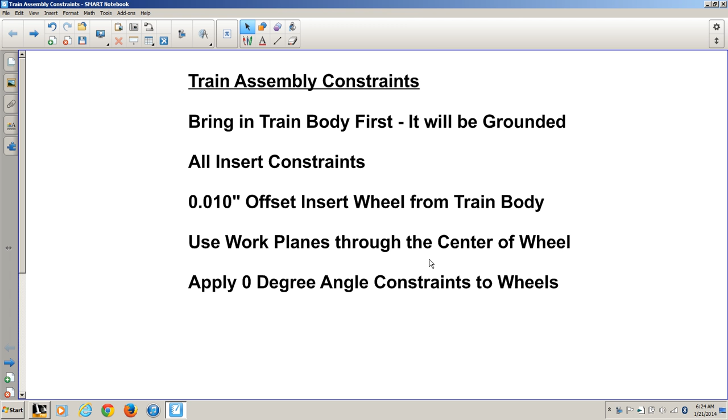Okay, we have the train mostly assembled. What we want to do now, we want to get the wheels all tied together using angle constraints. You'll also notice I just saved this as train. And again, if we look at this from the top, we've got a nice little bit of clearance between the wheel and the train body, so the train will be able to roll.

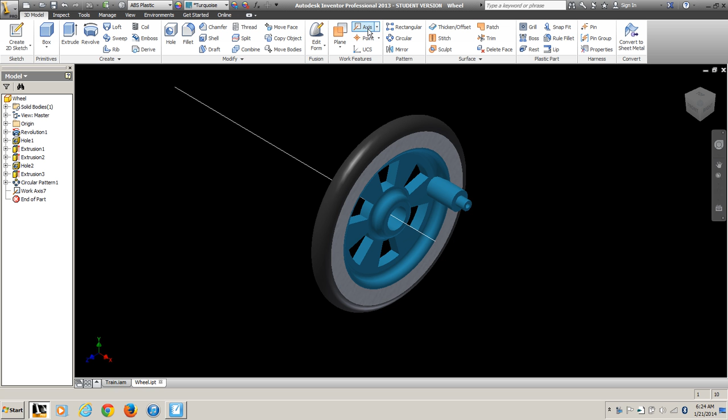To do the angle constraints, you're going to open up the wheel, and then we want to use work axes to create a work plane. So I'm going to point at the axle hole, and then I'm going to get the work axis tool again, and I'm going to point at the hole in the link peg extrusion there, and then 2 lines forms a plane. So now if I select those 2 work axes, that turns the work plane on.

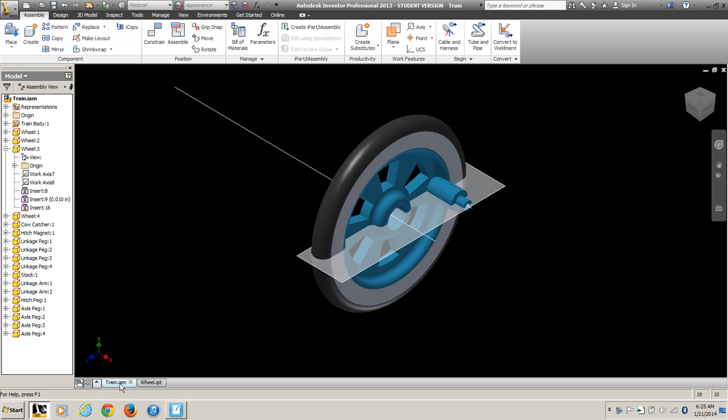You want to do that in the wheel file itself, not in the assembly file, because then that work plane will be turned on for all 4 wheels in the train assembly file. Okay, so now select angle constraint, and now we just want to tie those 2 wheels together.

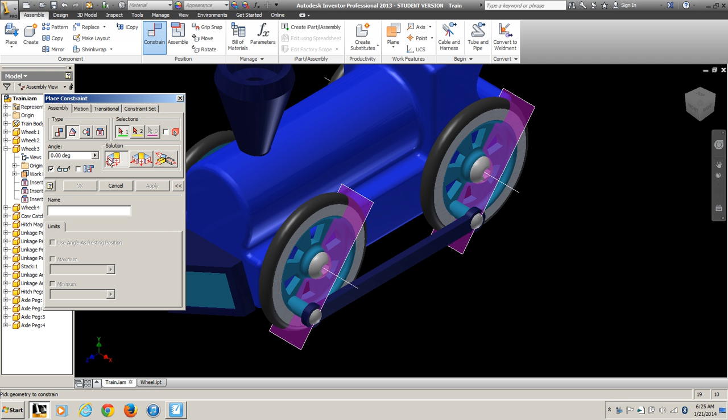When you make the selection here, make sure you point at an outside edge to be sure that you're not accidentally picking some geometry from the train. And we also want to make sure we're doing just 2 references for the angle, not 3. 3 points is an angle, but we just want to pick the 2 planes. So we're going to click that work plane and that work plane and apply a 0-degree constraint.

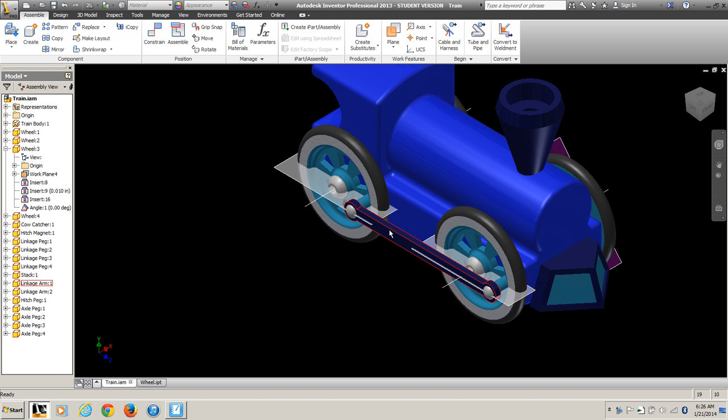Okay, and then on the other side, I'm going to pick that plane and that plane and apply a 0-degree constraint. And then, let me turn off my constraint for a minute. I want to make sure that one of my arms is down and that the other link arm is up. When the train moves, it does the freestyle stroke, not the butterfly.

So, and then we want to tie the 2 sides together. So I picked the work plane on one side and any 2 of those, and apply 0-degree to the other side. I select the two reference planes actually, and apply, and that should be good. So now you'll notice when one arm moves, the other arm moves.

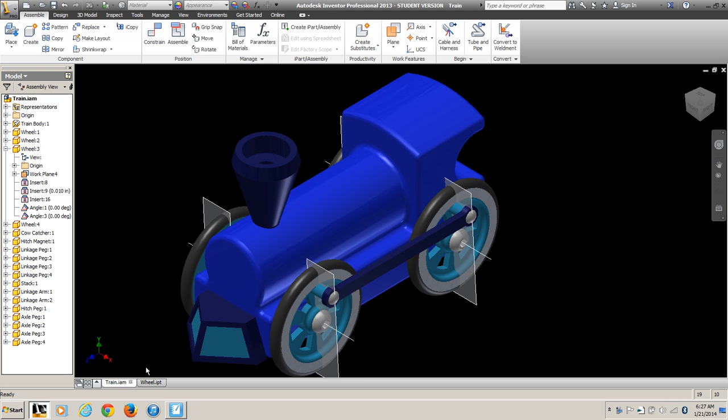Okay, so that's getting the work planes, and then you want to save that file, and then we'll bring that in as a sub-assembly for the straight line motion on the track.